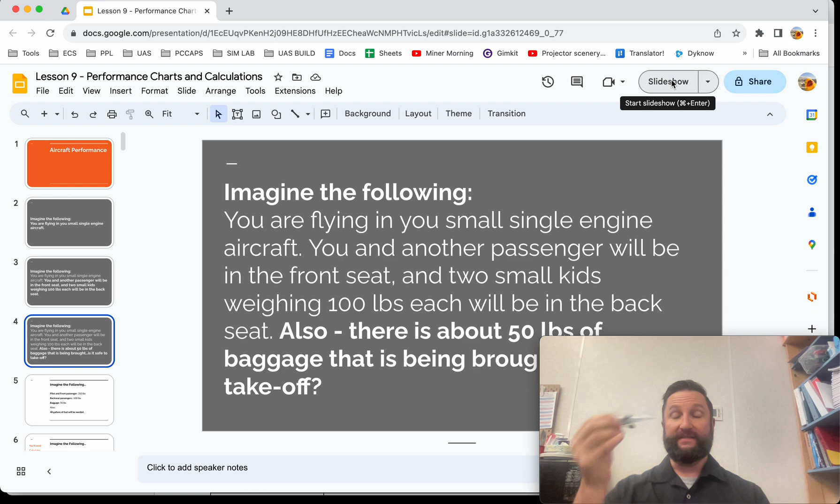Think about aerodynamics. We talked about CG, right? Is the CG in the right place so we can safely take off? How would you calculate that?

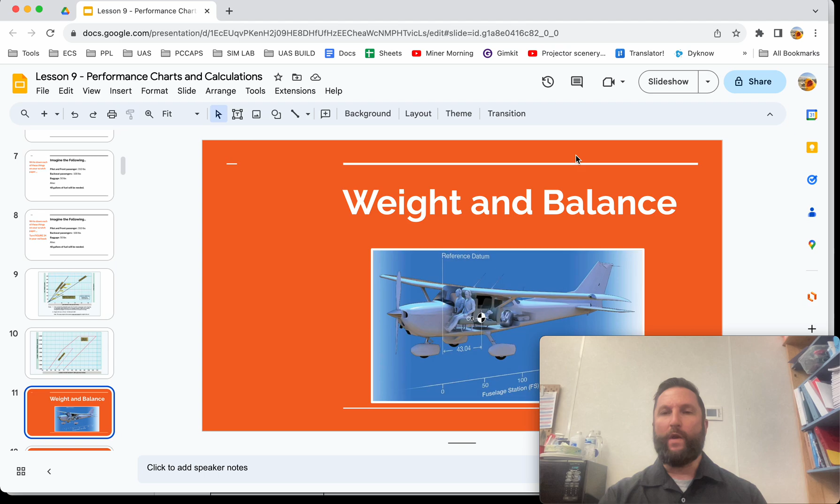So we're going to go over how to do those things in class using different charts, and we're going to talk about weight and balance. So let's get some vocabulary out of the way for this lesson so we're ready to go.

First thing, weight and balance. This is the process of calculating the distribution of weight in an aircraft to ensure it remains within its specified limits for safe and efficient flight.

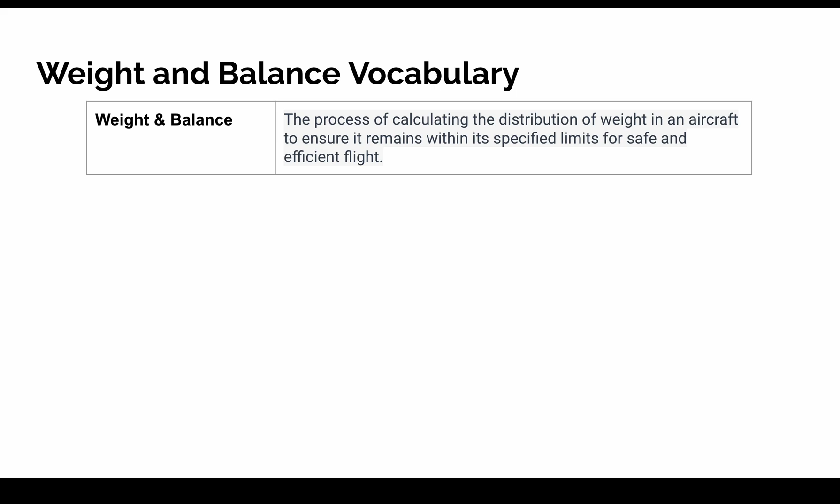Weight. This is the force exerted by an aircraft due to the gravitational attraction of the Earth. It includes the weight of the aircraft structure, fuel, passengers, cargo, or any other items on board.

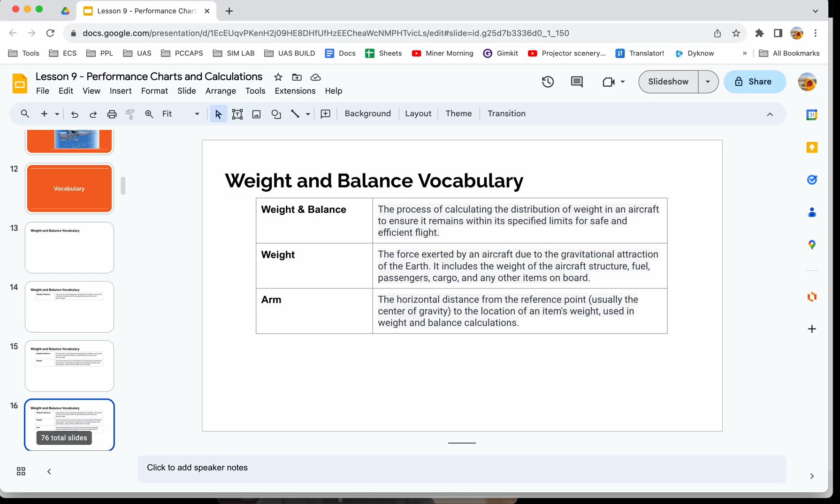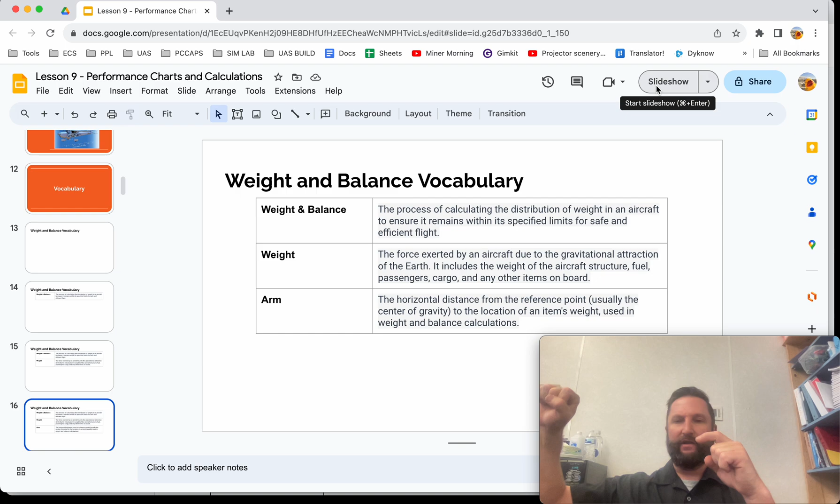Arm. The horizontal distance from a reference point to the location of the item's weight, usually used in weight and balance computations. So imagine a lever, you've got a fulcrum and then a lever going across it. The distance from the fulcrum to the edge of the lever, that's the arm. And the longer a lever is, the more force it can exert with the same amount of effort. So with a short arm, you couldn't move a big stone, but if you had a really long arm or lever, you could move the same big stone using the same force.

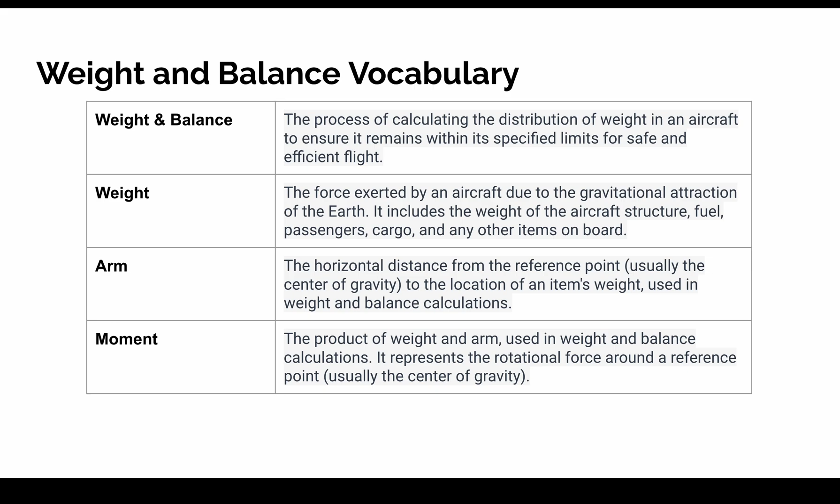So we use the term arm in flying, and I'll explain more about that in class. Moment, this is the product of the weight and the arm. Product means the answer to a multiplication problem. It's used in weight and balance calculations, and it represents the rotational force around a reference point, usually the center of gravity in an aircraft.

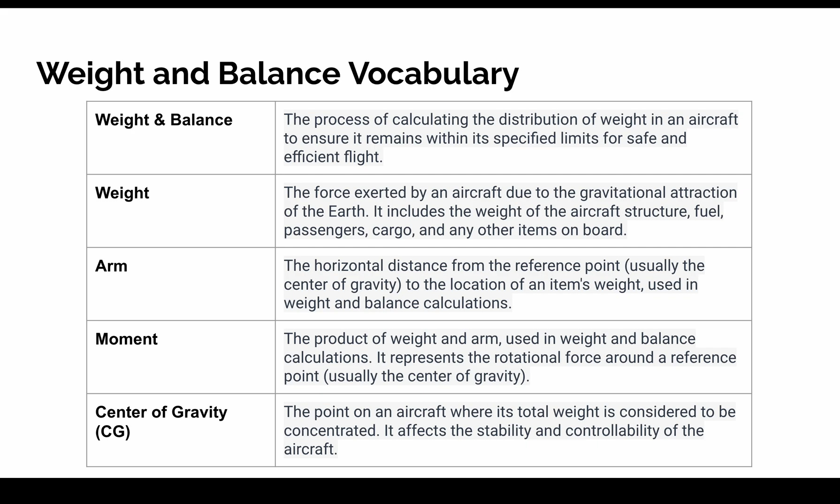And we keep talking about the center of gravity, so here it is. The point of an aircraft where its total weight is considered to be concentrated. Basically, if you think about all those axes, the lateral, the longitudinal, the vertical axis, they all meet at the center of gravity.

We also have maximum gross weight. This is the maximum weight that an airplane can be in order to take off or to taxi, different things like that. And then there's this thing called zero fuel weight.

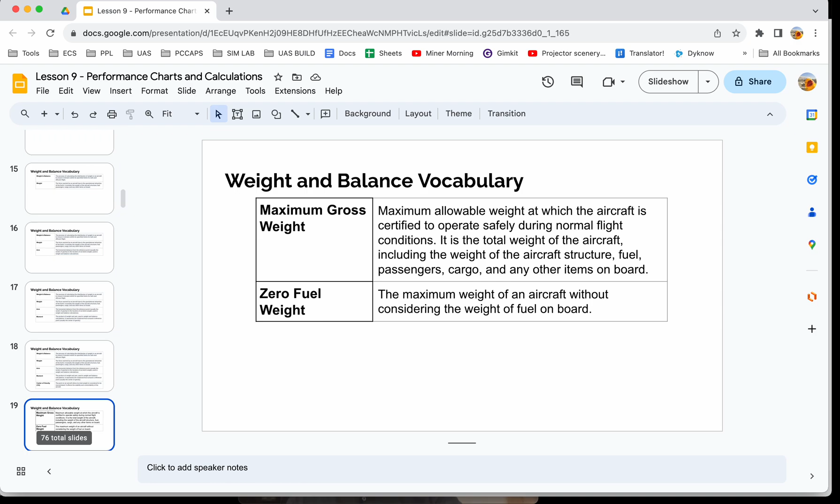This is the maximum weight of an aircraft without considering the weight of the fuel on board. Sometimes we use this so we can calculate how much baggage we're going to take, and then we pack on fuel and figure out our range, like how far we're going to be able to fly. Zero fuel weight, sometimes called ZFW.

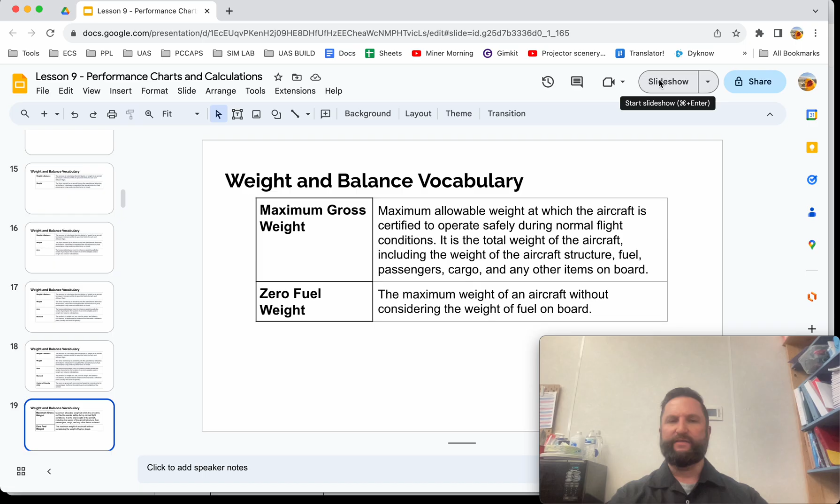BEW, the basic empty weight, is all the parts of the airplane plus the optional equipment, unusable fuel that can't be drained, and full operating fluids like oil.

Useful load, that's the weight of the crew and the usable fuel.

Takeoff weight, the aircraft's weight when it takes off. There's a maximum takeoff weight for every aircraft. For example, the Skyhawk, the Cessna Skyhawks, the one that I fly, the maximum takeoff weight is about 2,550 pounds. It can't weigh more than that, or it can't take off safely.

All right, next up is the formula for figuring out what CG is. Just write down: total moment divided by total weight equals CG, center of gravity. We're going to talk about that formula and use it a lot in class.

We'll do some performance problems.

And then we're going to talk about load factor, because this is how much load we're putting on the airplane, how much force we're putting on the airplane—the ratio of the total load supported by an aircraft's wings to its total weight, affecting the stress on the airframe during maneuvers.

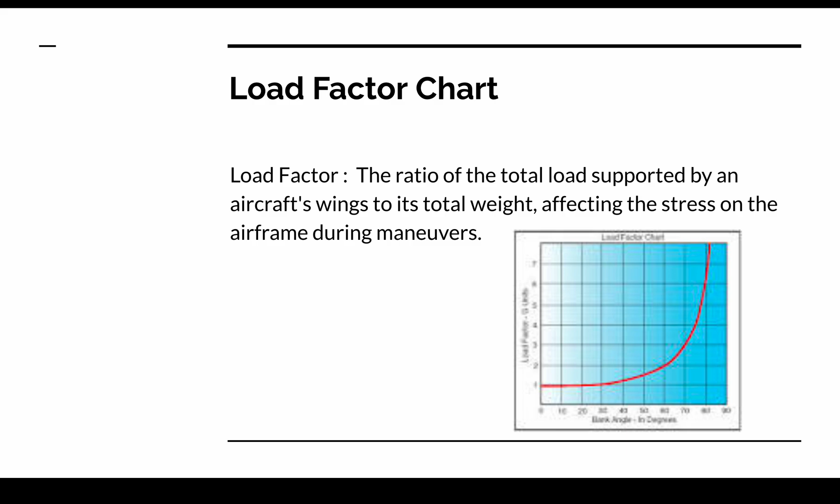We're going to talk about this chart a little bit and how load factor works. And then we're going to talk about how there are two different types of charts: table charts and graph charts, and we're going to learn to use both in this class.

Now, where would you find these charts in the real world? You would find them inside the airplane flight manual, or the POH, sometimes called the Pilot's Operating Handbook. Usually in section 5, there's a whole section on performance with lots of different performance charts. Some use the table method, and the same airplane might also use the graph method, so you just have to learn to read both.

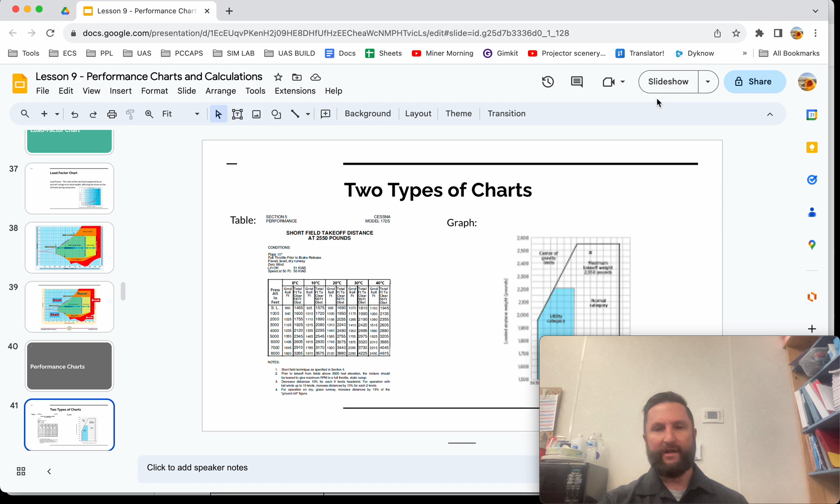We'll also use some examples from the actual FAA written tests so you can get a sense for how they use their charts.

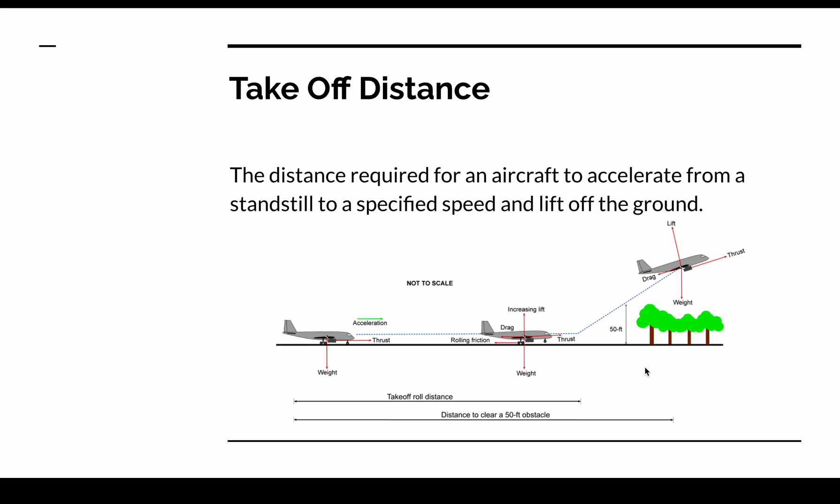Takeoff distance is one thing we're going to calculate. This is the distance required for an aircraft to accelerate from a standstill to a specified speed and lift off the ground. You can also figure out the distance needed to clear a 50-foot obstacle at the end of a runway.

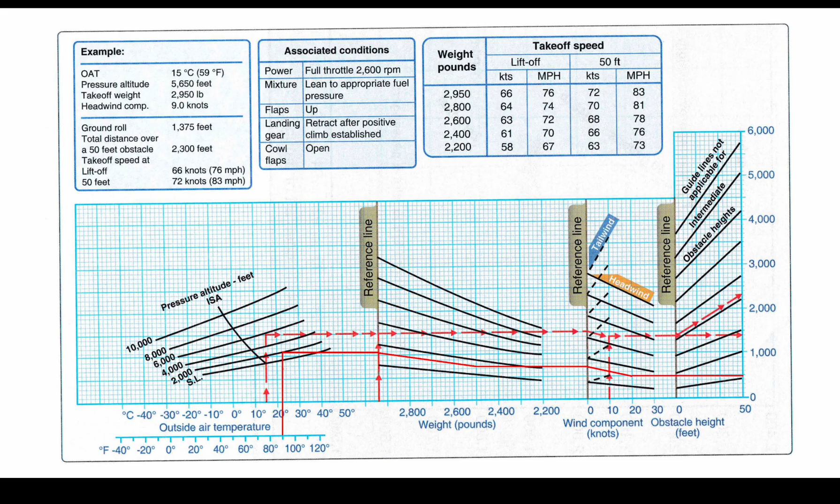Time to climb: how long is it going to take me to climb? This is the time required for an aircraft to reach a specified altitude from a given altitude. Let's say I'm going to fly to 6,000 feet MSL, mean sea level, and I climb at 500 feet a minute. So it's going to take me 12 minutes, because 500 feet is 1 minute, another 500 feet is 1,000 feet—that's 2 minutes—times 6, that's 12 minutes.

So 12 minutes. However, we're not always going from sea level. What if we're climbing from 4,500 feet to 7,500 feet? That's a difference of 3,000 feet, so we want to know the time to climb using that chart. It's a pretty easy chart to use, actually.

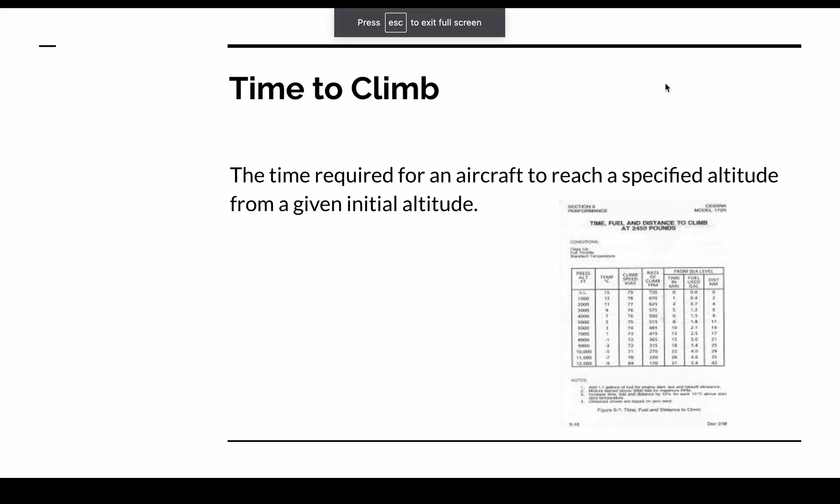Endurance and range—we're going to learn the difference between endurance and range. Endurance is how long you can stay in the air. Range is how many miles you can go. There are different charts for that, but one thing we're going to talk about with both those charts is the fuel burn rate.

This is the rate at which an aircraft consumes fuel, usually expressed in gallons or liters per hour. All the airplanes I fly here in the U.S. usually use GPH, gallons per hour.

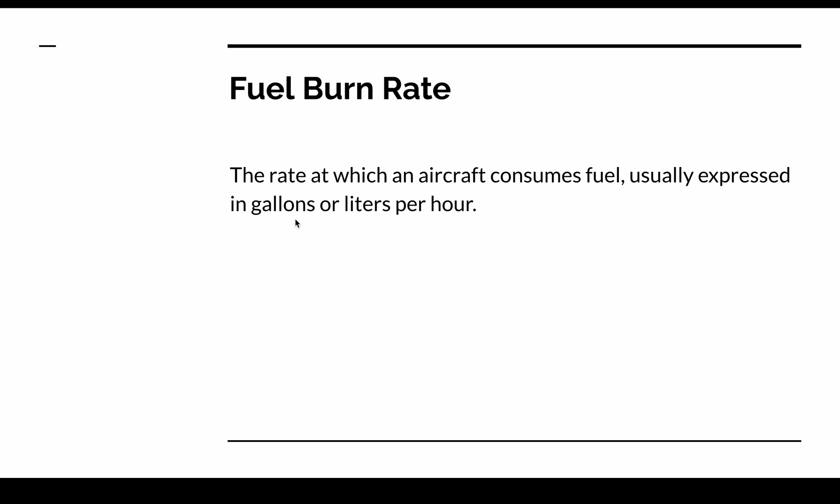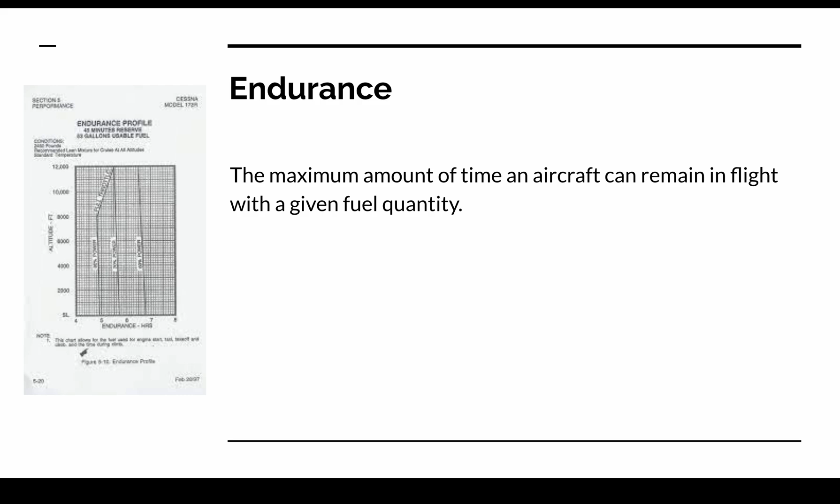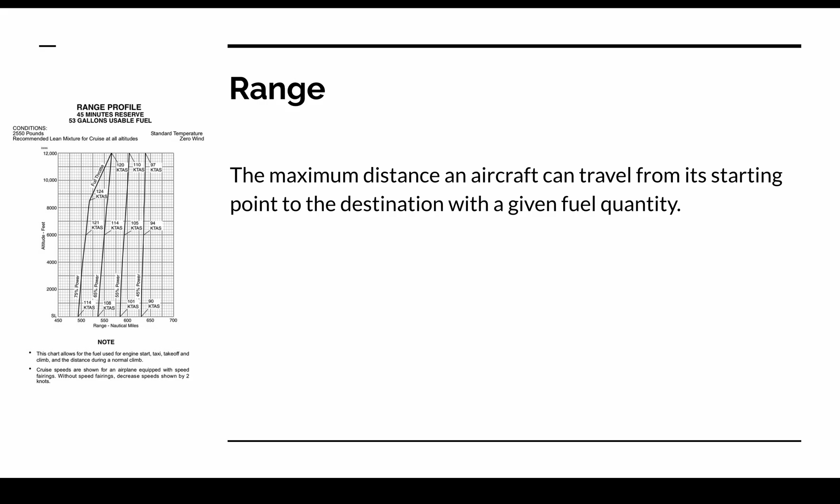Range is the maximum distance an aircraft can travel from its starting point to the destination with a given fuel quantity. So can I fly 100 miles? Can I fly 500 miles? How far can I go? It looks like that.

This is a rule I just teach in class. You really don't need this to pass your FAA written test, but I like to teach it because it's good flying practice—it's called the 3-to-1 rule. For every 3 nautical miles of horizontal distance you travel, the aircraft will lose about 1,000 feet. In other words, the descent rate is about 300 feet per nautical mile.

So you're flying along at 10,000 or 10,500 feet, and the airport, or the traffic pattern, is at 6,500 feet. I need to go from 10,500 down to 6,500 feet. So I'd say: 10,500 minus 6,500, where I am minus where I need to be vertically, that's 4,000 feet. I need to lose 4,000 feet.

And I don't want to start too late because then I come screaming into the pattern too fast. Everything's all discombobulated. I don't want to do it too soon because maybe there's terrain out here, or I want to be efficient, right? So I got to lose 4,000 feet, 10,500 feet, and I need to get down to 6,500 feet. So you take the difference. 10,500 minus 6,500 is 4,000 feet.

And then you say, okay, for every 1,000 feet, I'm going to move forward about 3 miles. So I'm going to lose 4,000 feet. So 3, 6, 9, 12. It's going to take me about 12 miles to descend down to that traffic pattern altitude. Is it perfect? Nah. You got to kind of fly a certain profile in the airplane to make it work all the time. But I fly the same profile just about every time.

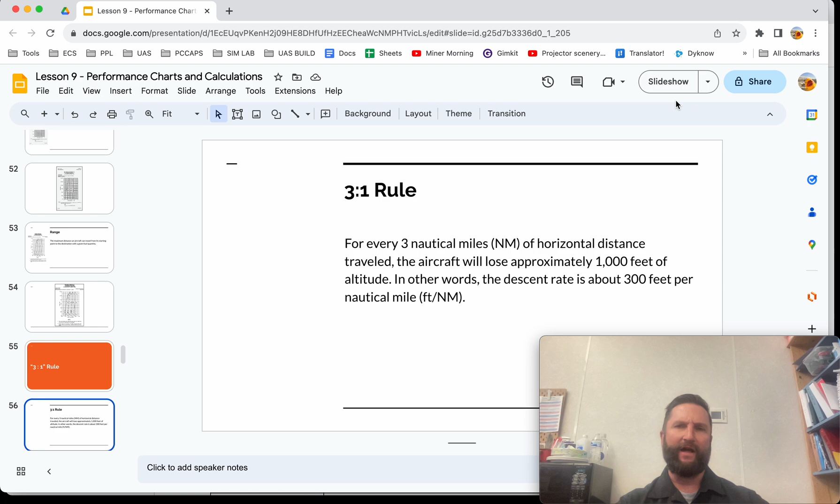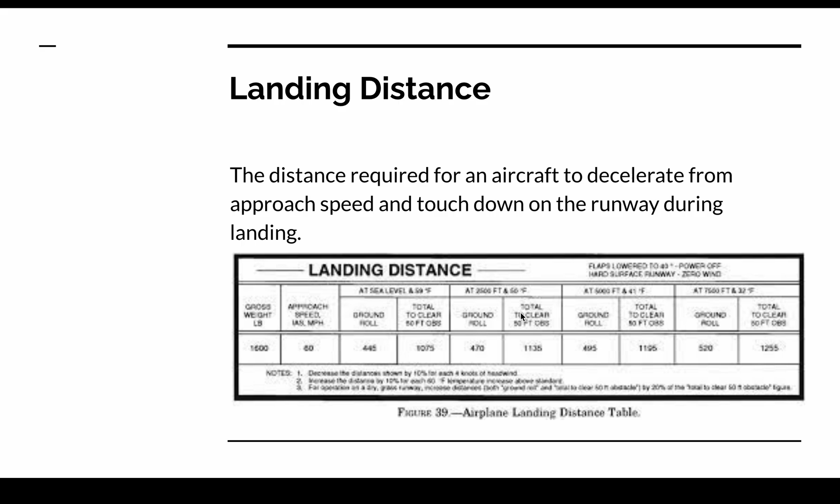Then we have landing charts. We talked about climbing. We've talked about cruise flying, how far we can fly, how long we can fly, all that. But now we need to talk about landing. And this is the landing distance, the distance required for an aircraft to decelerate from approach speed to touchdown on the runway during landing. We're going to learn to use this chart. Or this chart.

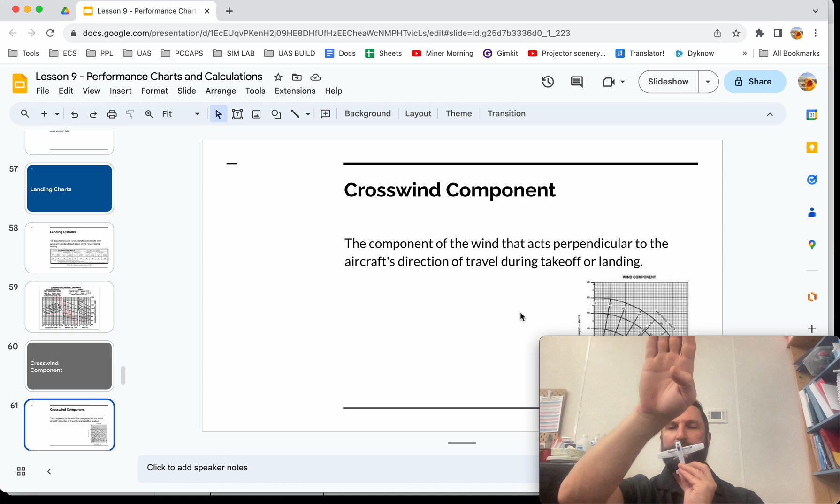All right, crosswind component. So you may have heard of a crosswind, but the crosswind component is the component of the wind that acts perpendicular to the aircraft's direction of travel during takeoff and landing. There's a lot of big words in there, so we're going to talk about that. But as you're coming into land, if there's a direct crosswind, the plane's going to try to get pushed off the runway. So I'm trying to land on this runway, right? And, oh, sorry, my hands are backwards. And I keep getting pushed off that runway one way or the other. I want to be on the center line of that runway.

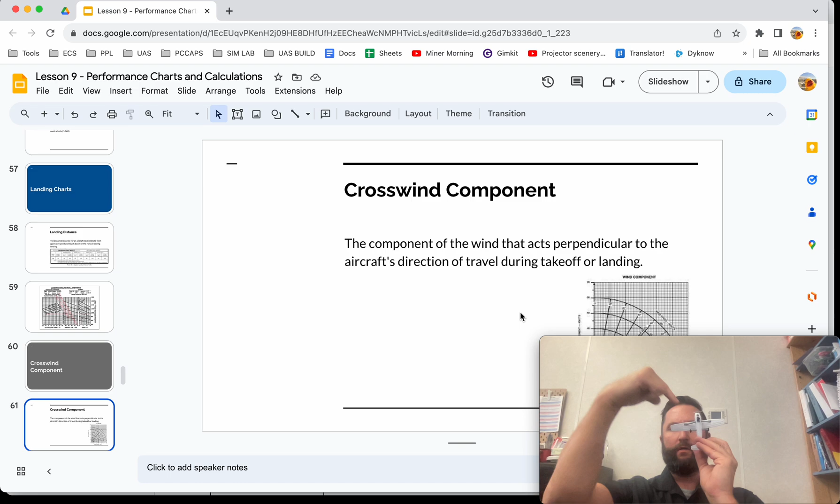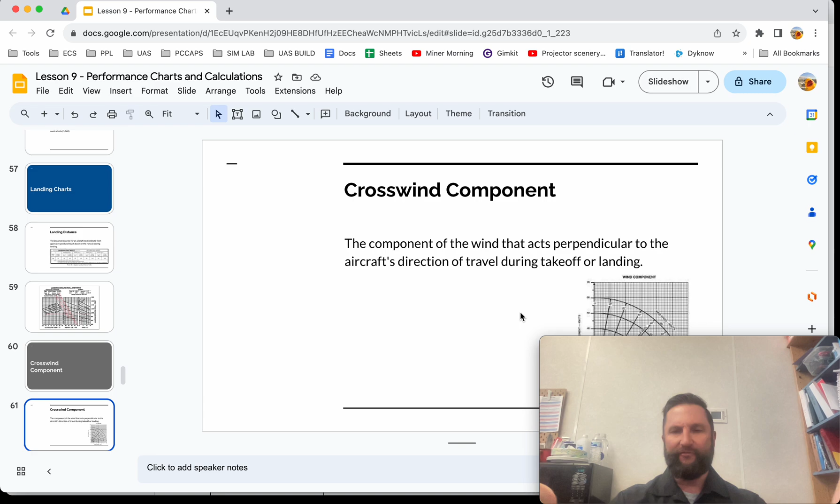Now, what if it's not a direct crosswind? What if it's kind of what we call a quartering headwind? What if it's like this? Does it still push me off? Sure it does. It pushes me off a little bit, but is a 10-knot crosswind equal to a 10-knot quartering headwind? No. So how much effect does it really have? That's what the crosswind component chart does. Very easy chart to use. You'll learn to use that one in class as well. Looks like that.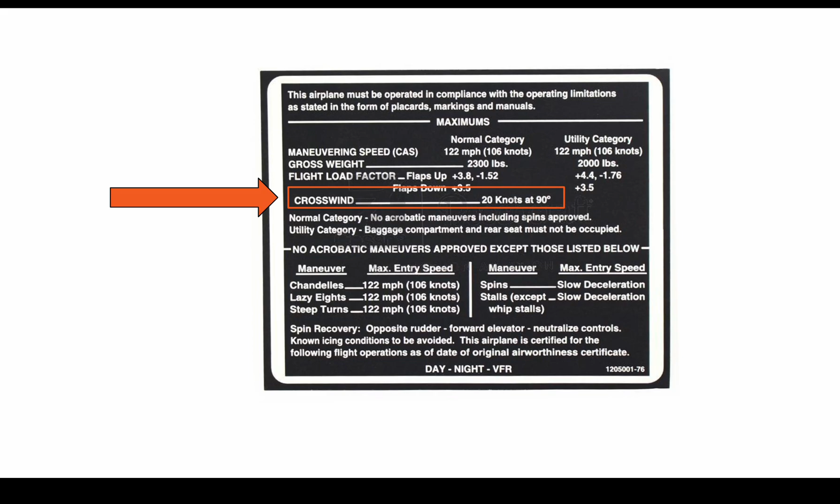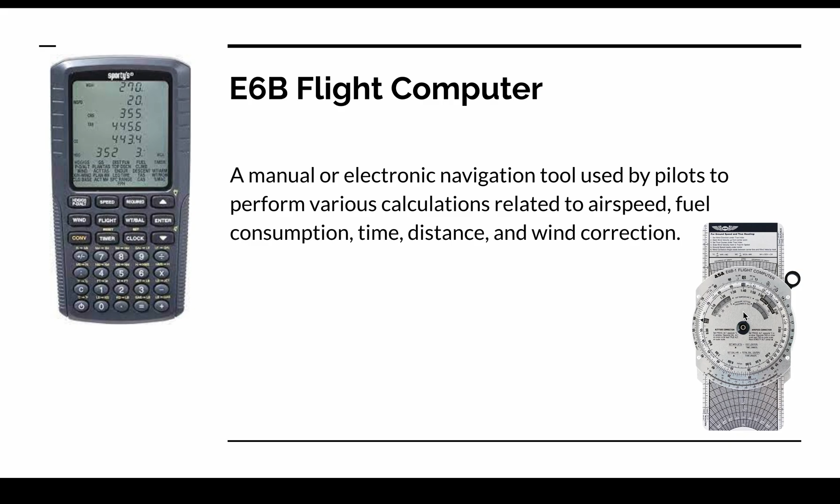Two things that we're going to learn to use in class. One is called the E6B flight computer. And this is a manual or electronic navigational tool used by pilots to perform various calculations. Looks like there's an electronic one, there's a round one. We're going to learn to use the old school one. I have these for you to use in class. So you'll be learning to use this thing, spinning it, making calculations. You should get pretty fast at it. It just takes practice. So we'll be practicing. We'll be using those in class.

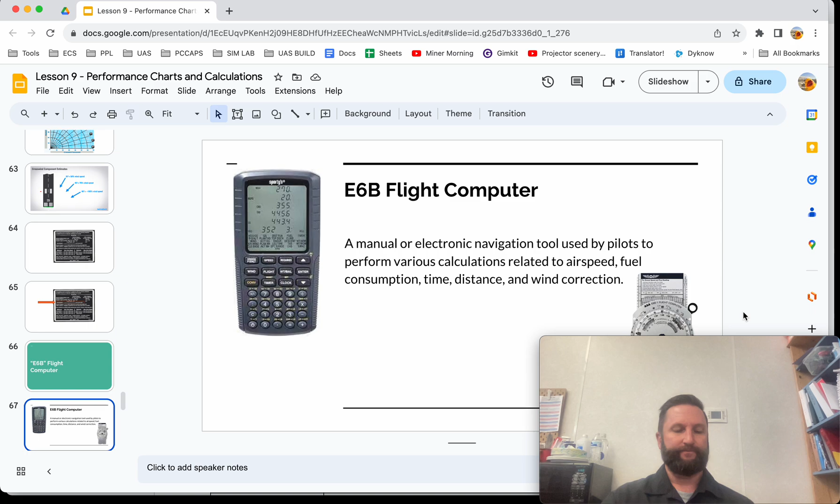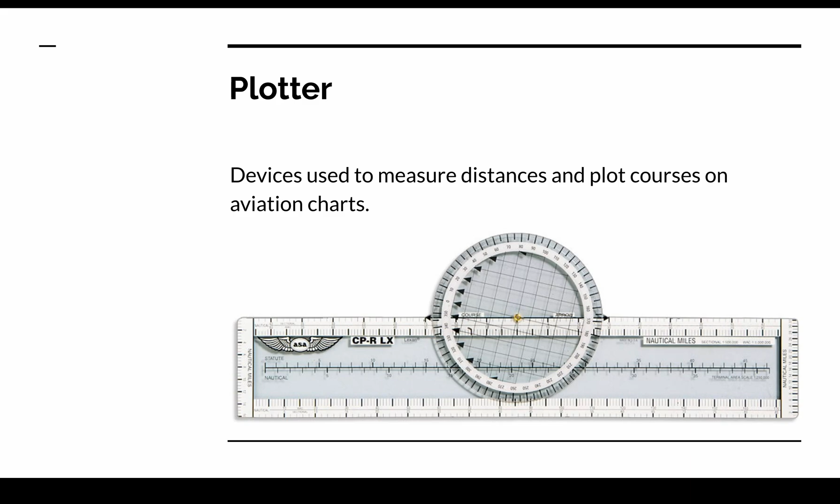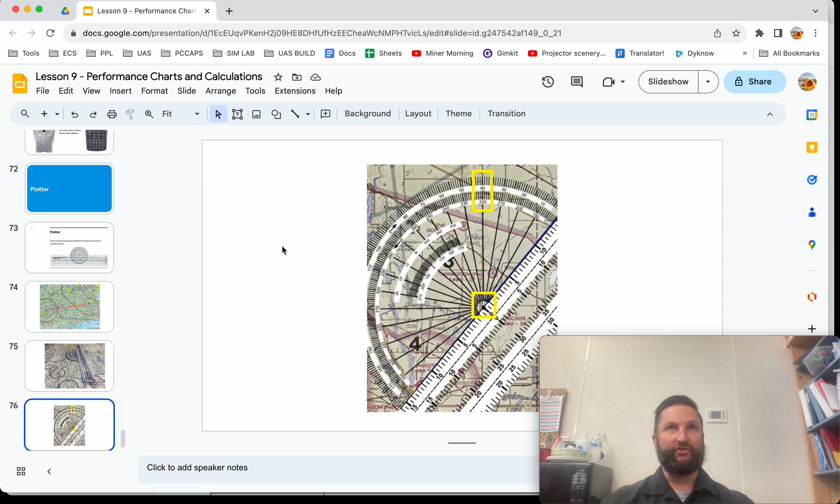And then the plotter. This is what we use to measure distances and angles on maps. So if we're going to fly from here to there, we can lay down a plotter, figure out wind correction angles, figure out all kinds of things. So we'll be learning to use those in class as well. Hopefully you got all that vocabulary filled out. That'll help free up your brain power. So in class you can concentrate on using the charts and not all the vocabulary. It won't be the first time you've heard it.